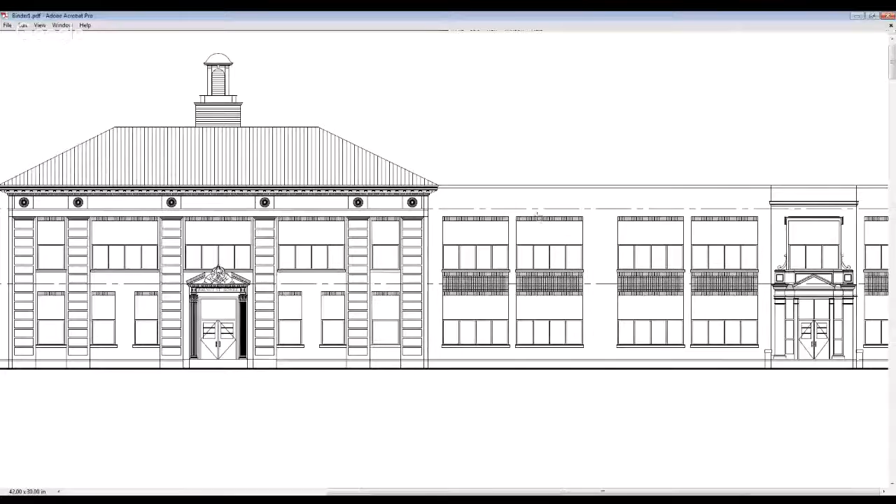Okay, I'll share my screen. Nice drawing. Did you construct that? Yeah. Good for you, was that fun? Yeah, it was a lot of fun, a lot of tedious work, but nice. It's right on the mark, I can tell it's detailing, I can tell it's accurate.

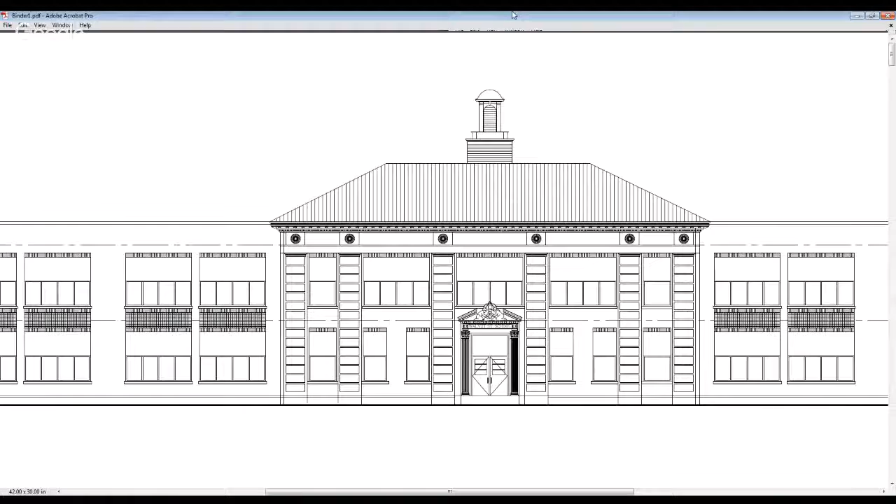So what's interesting is that with my work, I'm trying to go for a function that is modular, whereas a lot of traditional architecture has a functional or modular aesthetic to it, in that there are these interchangeable parts, and it's up to the designer to figure out what exactly they want to do with that. It's a bit of a side note, but...

So each window is a spandrel panel. I don't have proposed elevations yet, which I'll get together for the benchmark review, but the top half of each of these are spandrel panels. I'm thinking of just taking those out, bringing in a lot more natural light, essentially doubling it in the building, from just the west facade.

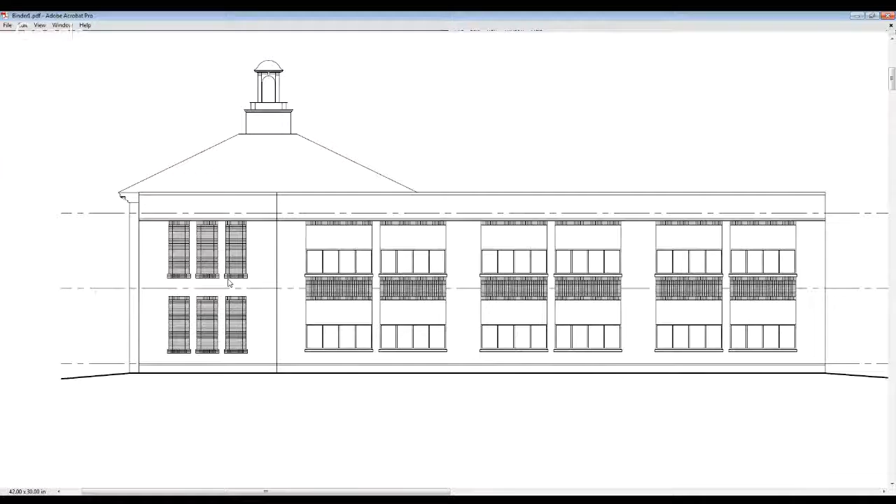Then going over to the south facade, which is almost identical to the north, there are these filled-in windows on the west end that I found, which I can open up to bring in more natural light that way. Same thing on the south end with spandrel panels — those can go, because for my building I don't need a lay-in ceiling or anything.

So I'm not exactly— Adam, why do you think they introduced spandrel panels? To cover up the utilities and lower the ceiling. So I think you just have to reposition the order of things, right? You're eliminating the lay-in ceiling, the light fixtures, and the mechanical systems that serviced the spaces that were once classrooms converted into office space, to allow for the physical ship in the bottle thing to happen. In doing so, it permitted you to introduce new glazing where it once was by eliminating the spandrel — the lowered ceiling was the driver for the spandrel. Yeah, right.

I'm not exactly sure what would all change with the prefab metal building at this point, because I'm not really thinking of changing the function of it. I don't think we know what goes on inside of it, but you could paint it, or introduce some signage, maybe painted signage. I don't want you to do a Best Buy, though - if you look at a Best Buy, it's just a dumb box with a wonky, bright, vivid logo as a kind of pylon or armature in front of the dumb box. You follow that explanation?

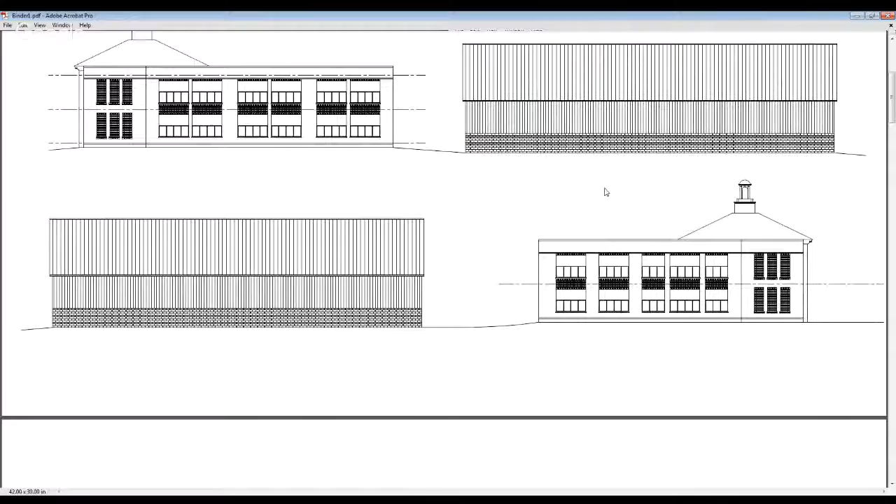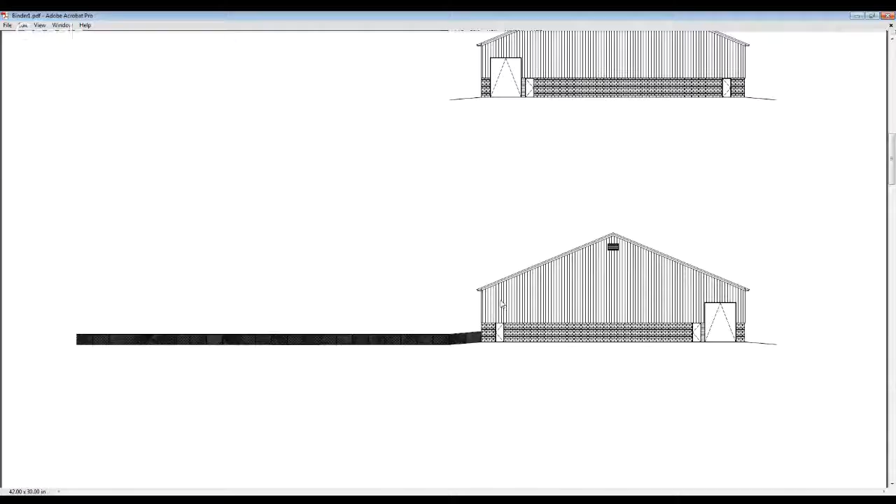These are the north and south elevations. Right now it's just a chain link fence, so that can be changed into something a lot nicer - anything else at this point than just a chain link fence. Maybe bring in some vines growing up it, bring some life to it. And then the overhead door could become a glass door, letting more light in there.

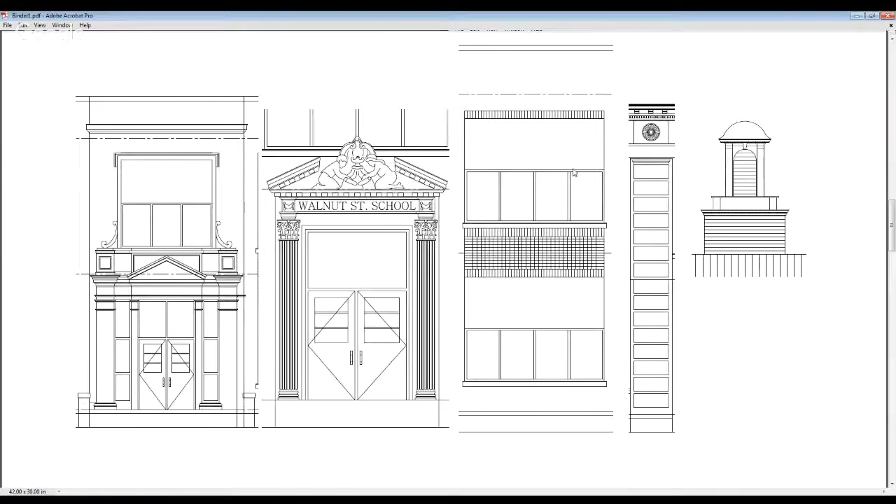I enlarged some of the details because I wasn't sure how it's going to show up, since on my screen it kind of blurs everything, all the lines together. But it looks good here.

I was able to get a good estimate as to where the floor levels are. I'm just assuming they're equal height, so that would probably put the floor pretty much right dead center within that brick detail, between the window head and the next windowsill.

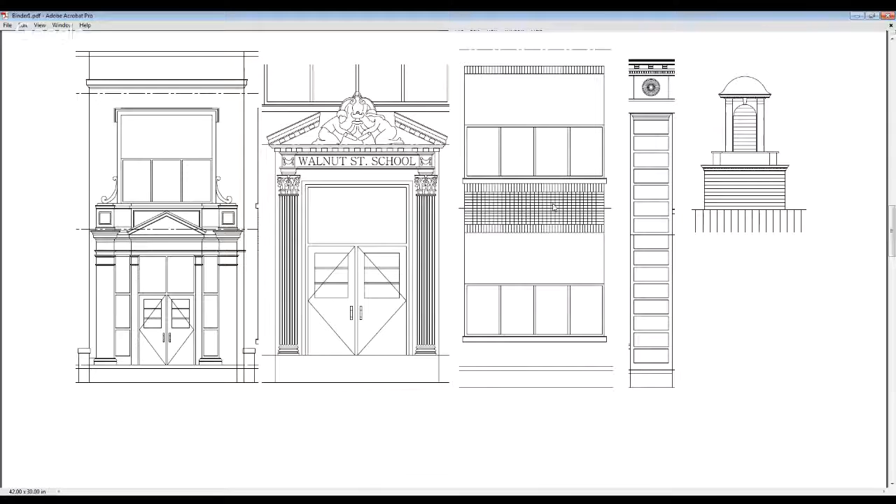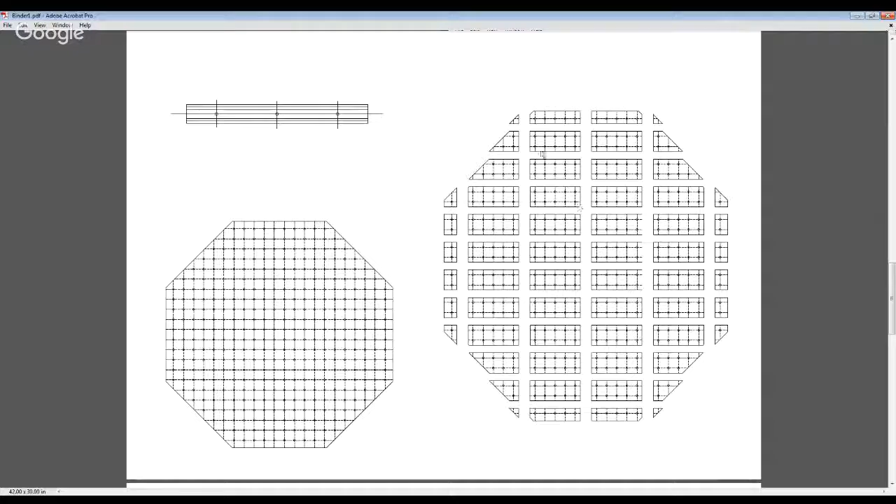Each of these panels would be able to be disassembled into pieces no larger than the size of a basic door. So most of them are about 2 foot 8 by 6 foot 8 - the rectangle with the holes in it is 2 foot by 6 foot, 2 foot 8 by 6 foot. And then they get chamfered or triangulated to suit the condition.

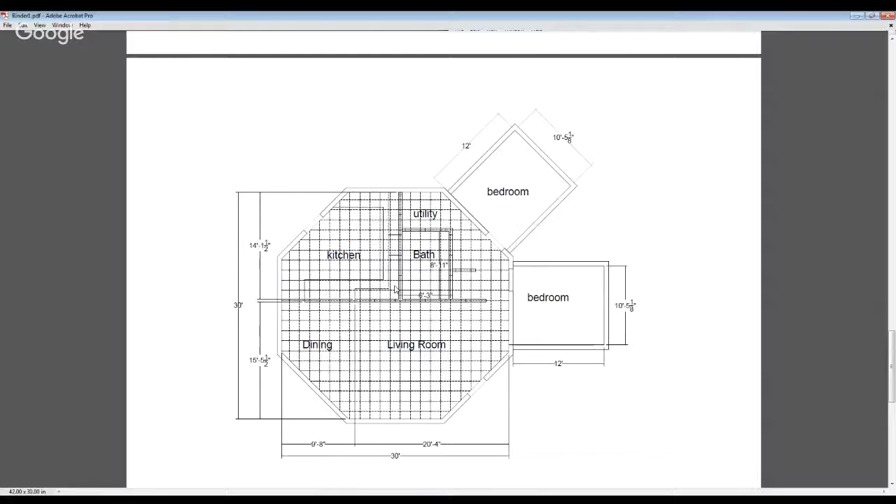I did kind of a test fit - I'm not going to show actual fixtures, but just to show how this could possibly be laid out. I should bring in some hatch to fill in the walls, and of course have the doors and windows, but just zoom in on that - I think it can work. Nothing's lavishly large for any of these spaces, but I think they're all very workable.

So I'm wondering, Adam - no, the bathroom's fine. Actually, the bathroom's very big. The bathroom could be smaller, you could do that 5 by 8 easily, and that would privilege more space for the closet and the corridor and the link into the bedroom.

If this was a prison room or a prison cell, there wouldn't be any walls, right? The toilet and the bed and a sink and maybe a bench, they'd all be kind of built in, and everything would be out in the open. Obviously we do that for security, but I'm not suggesting you don't do walls here - I just want you to be cautious.

I want you to be deliberate about walls, in the sense that I kind of see walls separating dining from kitchen and kitchen from utility, and I think your instincts are there - I think you're good with everything. I think the length of the living room wall into that bedroom area is about right, but maybe we don't need that wall at all. For example, that little tab that comes off of the bathroom wall where the 6'3" dimension is - so I just want you to...

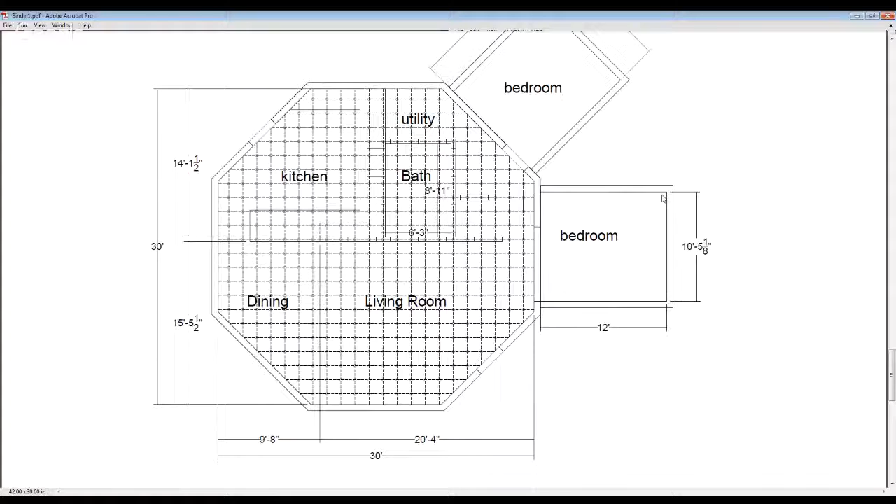Okay. Because if this is only 2 bedrooms, there's not a lot of noise here, and these are fairly spare and minimal, and I love that about them, but you have to show clear intention. The bedrooms could be smaller.

Is that 12 foot and 10 foot 5 1/8 based on something? Is there some purpose to that, some basis for that, Adam? I can't remember why it was. I want to make sure - I think the 10 foot 5 1/8, it's not a specific number. It could be smaller, but just 12 inches less on each side.

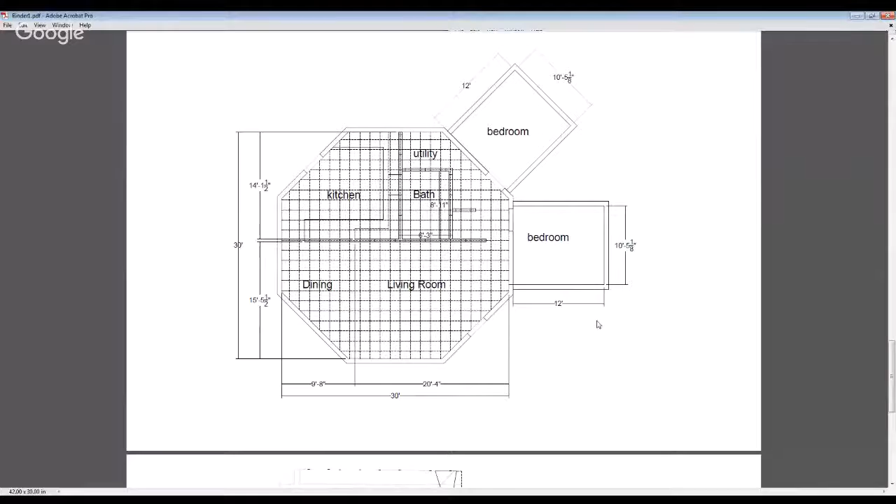So again, what is the wall? Is it studs from Home Depot with drywall and maybe some exterior siding, or is it 4 by 8 sheets of drywall or OSB or particle board or corrugated metal? Is there a module or dimensional virtue to these things so that the 12 foot and the 10 foot 5 1/8 actually work to a material module, so the wall lengths and depths and widths make sense, so materials aren't wasted by being cut to make your dimension. You know what I'm saying? Yeah.

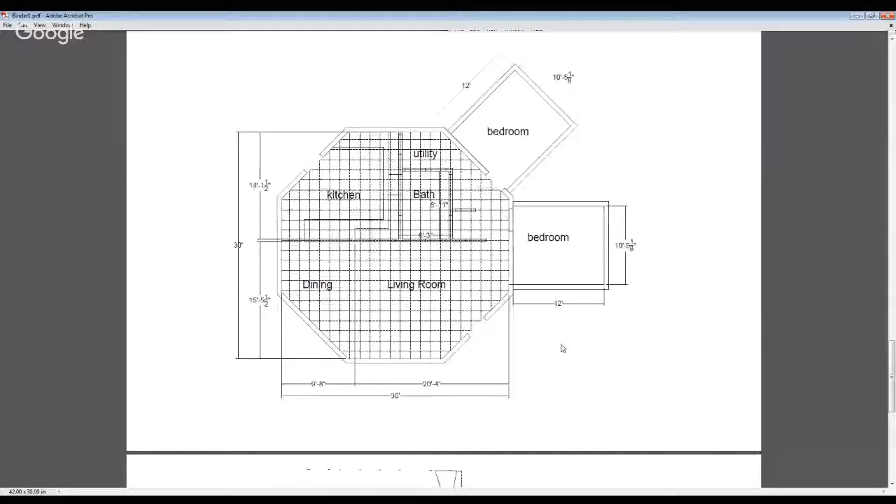Cool. And then moving on to a sort of test fit of the space. I want to bring in a good combination of both - be able to bring in a lot of houses into one space, but also leave communal space in between things, organized based on where they are in the building. And then along the back, there's all this mess of different additions over time.

I think with those, in order, it could be advantageous just to demolish those and then bring in glass along the east side, looking out into this outdoor space, and bring in plenty of daylighting through the walls. Or maybe it's not glass - I can imagine that's going to be like Kawneer sash and glass, expensive. It might be more interesting not to have glass.

It might be more interesting to do some sort of translucent polycarbonate panel, like a honeycomb, 1 inch or 1.5 inch thick, 2 foot by 18 foot tall honeycomb insulated polycarbonate panel to bring light in but also provide insulative value. Have you been to campus lately? Have you seen the new Morphosis building? They were finishing up when I was last out there. So the curtain wall is this translucent sort of lantern at night, but it lets daylight into the space. So it's not - I kind of see that as a possibility.

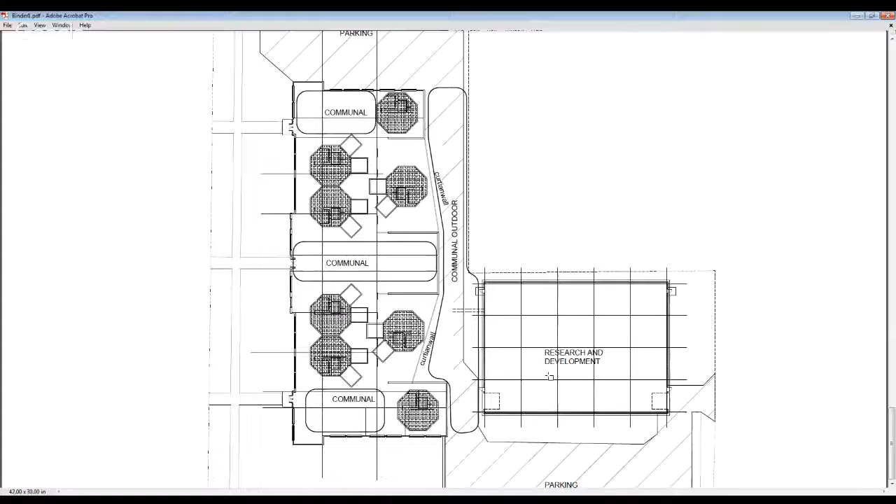So I really appreciate the plan, but I also want to make sure that you show as much of the context as possible. I'll add in that I see the curb lines and all of that. I don't know that I'd handle the parking lot as a large scale hatch.

I think I would show parking spots. You could stipple it, but I don't know that I'd put a hatch on it. And you may want to color code the plan so that the architecture is distinguished from the building, or from the site, so that parking and building don't blur together. Because if you take that hatch out, it's not going to be that clear.

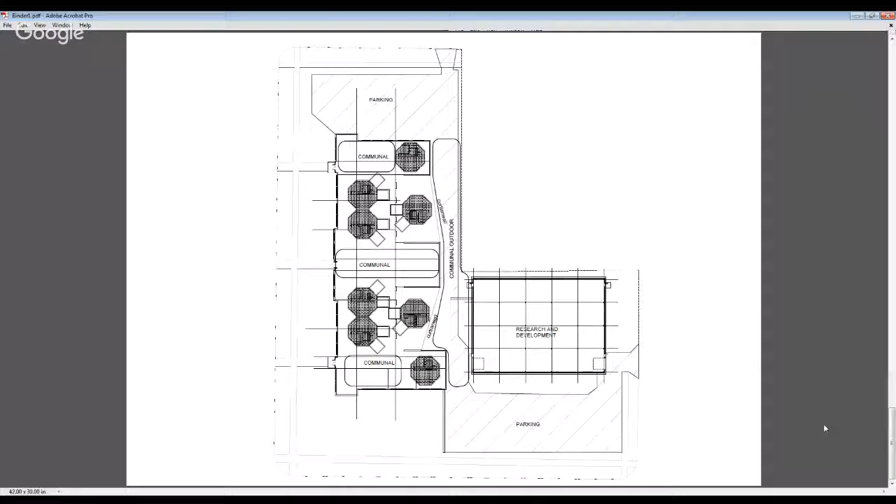Okay. Now, can you close this and type in your browser Coop Himmelblau. Do you know that work? No, I don't. COOP, next word, HIMMELBLAU. Coop Himmelblau. They did a museum in Akron.

Can you pull that up, Akron or Canton? I think it's Akron, it's in Ohio. Akron Art Museum? Yeah, can you pull that up? I'm not hearing you say good grief, or wow, or awesome. Yeah, you need to go to images. Oh, okay, wow.

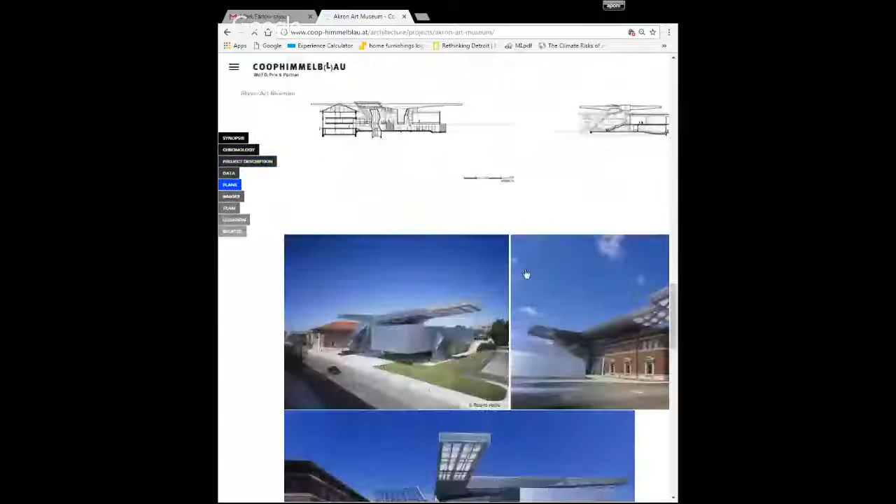So do you appreciate why I'm showing this? Look at the original building. I know you're looking at their site, but I think I'd like you to look at Google Images. Okay, that's a good example. Yeah, that's this, this is the original. So that was the original art museum, and it probably had a whole bunch of old men in tweed coats, smoking pipes, looking at impressionist paintings and purring.

But they outgrew that demographic, they outgrew that space, and they wanted something that was contrary architecturally to the old dowdy chassis. So they hired a star architect to create something that was contrary and at the same time would draw attention to the mission of art in the community of Akron. And boy, did they, right?

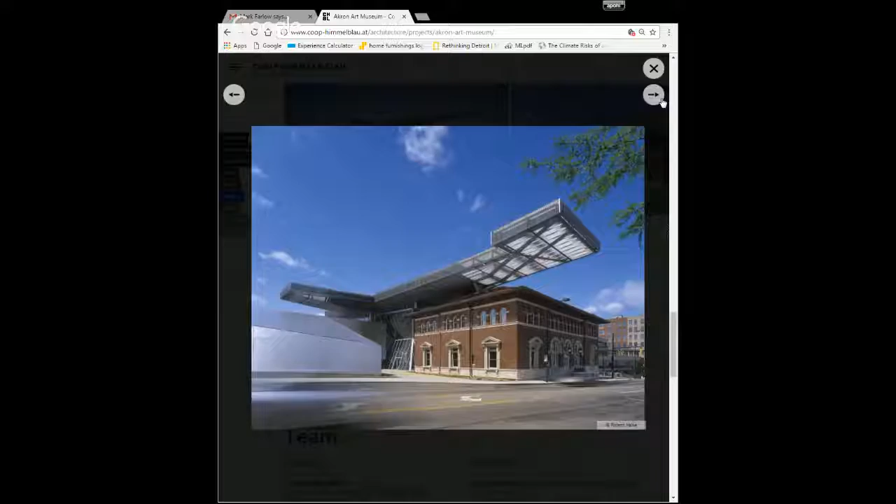Yeah, so this thing's like, well, it's preposterous. That cantilever is enormous. I'm not saying that I want you to do this, but I want you to notice that there is a possibility of creating that kind of tensional condition, not only on the outside, but on the inside. And I think they do that.